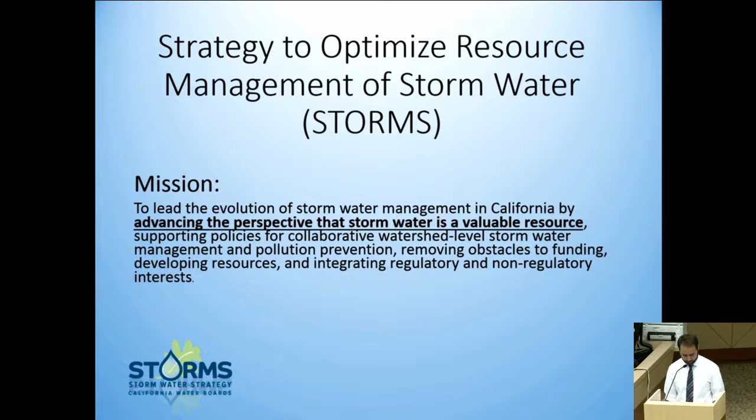My name is Matthew Fries, and I work for the Stormwater Planning Unit. We have the privilege of implementing the State Water Board's Stormwater Strategy, or as we like to refer to it, STORMS. The mission of the strategy to optimize resource management of stormwater is to advance the perspective that stormwater is a resource. These Storms seminar series are an open forum that feature new research, technologies, policies, and news relating to stormwater. And here to present on dry wells is James Mayer.

Okay. Can everybody hear me? Yeah? Okay, good. So, thank you, Matthew. Appreciate it.

It was great to meet you guys a couple months ago with Annalisa, and we'd love to have this opportunity to talk to you about dry wells and recharge this morning. So, we'll talk about deep infiltration in dry wells. A little bit about me. I've been in the commercial development engineering industry for about 22 years. I worked for the city of Scottsdale for the first few, so I got a municipal side of things, and then mostly as a consultant and a developer after that. But almost always I've been dealing with dry wells because I'm from Arizona and that's what we do there.

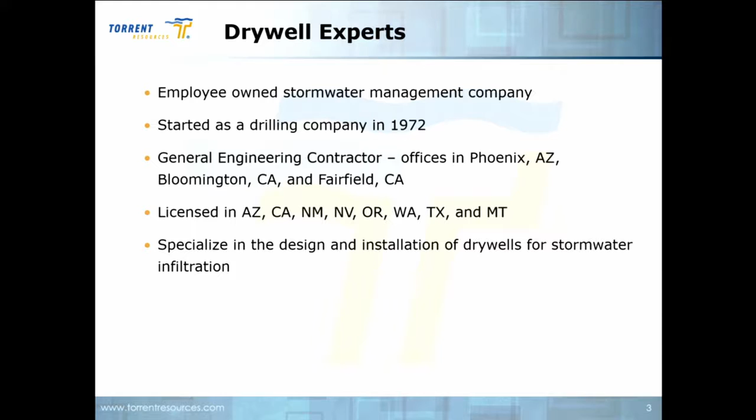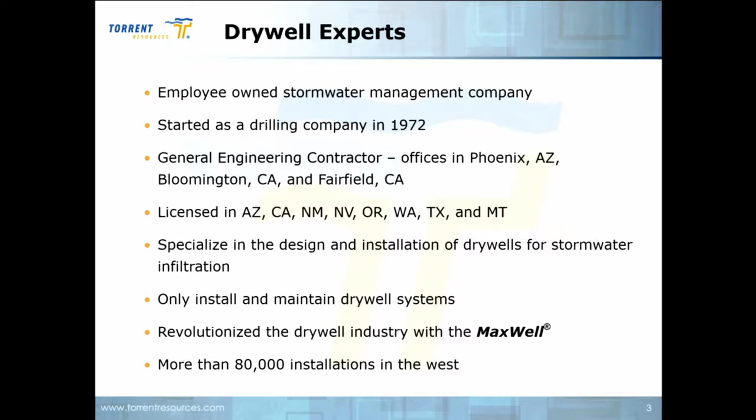So a little bit about my company, and the reason I'm talking about this is we are kind of dry well experts. We've been doing this for 43 years and we've kind of got it dialed in. We're an employee-owned company, started in '72 as a drilling company, got 3 offices, a big office in Phoenix, a smaller office in Bloomington, and we've got Travis Pacheco up here. He's sitting in front. The Bloomington office is growing very quickly right now, our Southern California operation. We're licensed in the West and Southwest, specialize in the design and installation of dry wells for stormwater infiltration. We only install and maintain drywell systems, and we're going to see a little bit about our MaxWell system, but it's a pretty generic look at it. 80,000 systems we've done in the Southwest. So that's our expertise, that's our experience, and that's why we're here today.

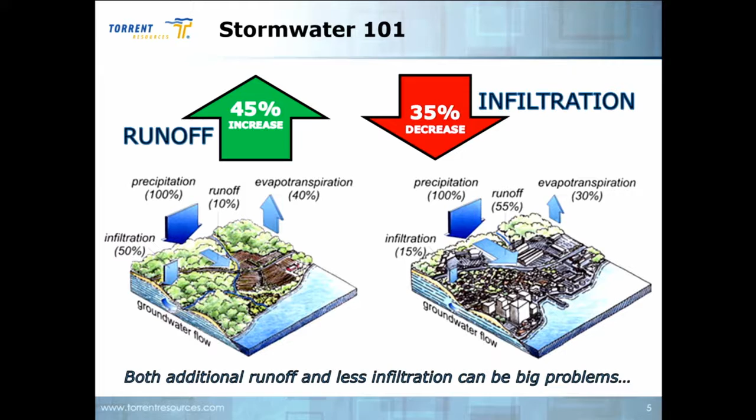So what that looks like functionally, before you've built anything, you've got about 50% of the water getting infiltrated, only 10% is running off. And after you urbanize or develop, you basically have a reversal of those 2 numbers. Only 15% is going down and 55% is running off. And that's a big problem. The additional runoff is causing problems, but also the lack of infiltration is another problem that causes us to want to store that water. So we're managing stormwater. The old way used to be to grade the site out to the street, let it go out in the street. Stormwater is moving into channels, creeks, or whatever, and it goes out sometimes to the ocean, sometimes to larger water bodies.

That creates a lot of problems. You get downstream flooding, erosion, waterway impairments. So the new way is starting to move towards, I think people are familiar with LID, low impact development. We want to catch the rainfall on site where it lands, or at least some portion of it, keep it there, sometimes just until after the peak is gone, and then we can either let some of it go down and let some of it go off.

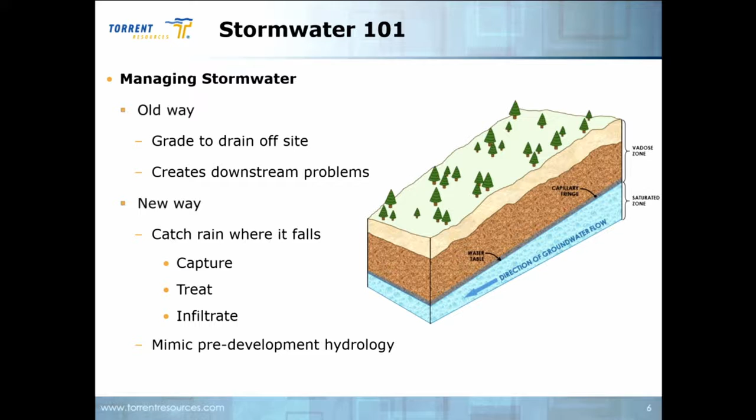But I think the big goal here is capture, treat, and infiltrate. And to the extent we can, we'd like to mimic pre-development hydrology so that we're still getting that 50% going down and only 10% going off.

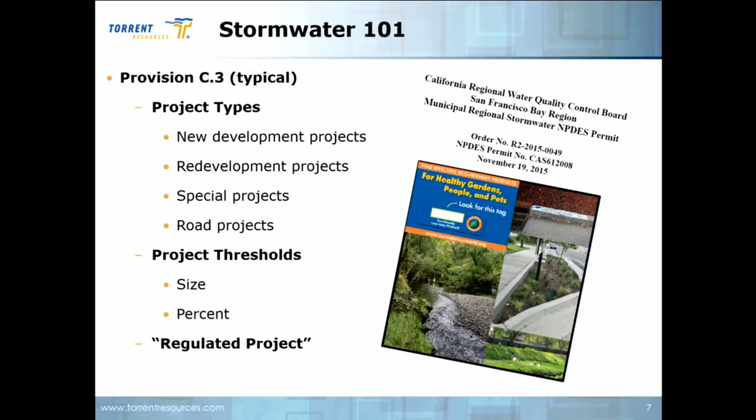So up here, I think a lot of policies, NPDES permits, MRPs, et cetera, have a provision C3, and that's going to be talking about the different thresholds we have, size and percent impervious for new developments, redevelopment projects, special projects, roadway. And once you hit those thresholds, you've got a regulated project, and then we start looking at what's required for that. So almost always, infiltration is the first thing they want to see. They want to do infiltration first.

After that, if you can't do infiltration and it becomes infeasible for a number of different reasons, we can go to harvest and use, evapotranspiration, and I think the last ditch is to do biofiltration and discharge it, let it go off-site. But for the purpose of today, we're going to talk about infiltration and focus primarily on that.

Can everyone hear me okay?

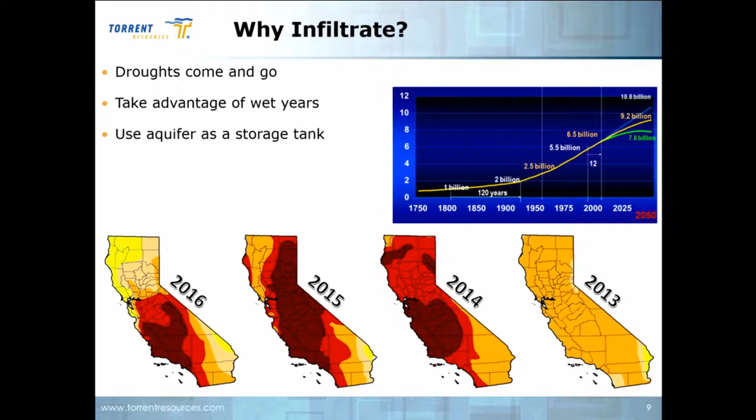So in the wet years, and we do have wet years, although it's kind of hard to remember some of them, we could be taking that water and we could be putting it back in the ground and replenishing the aquifers, use the aquifer for a storage tank. So we'd like to do it that way to the extent we can because our demand is only going to go up. Another big reason is subsidence.

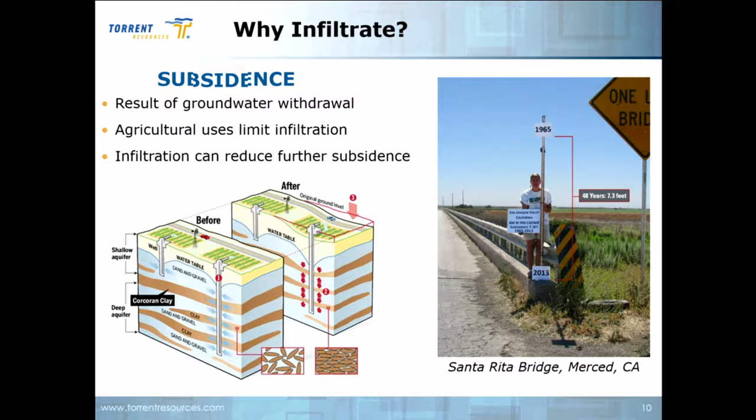And to the extent we can start to rehydrate those clay layers, which are getting dried out and collapsing, we can't reverse that subsidence, but hopefully we could at least stem it and prevent it from getting too much worse.

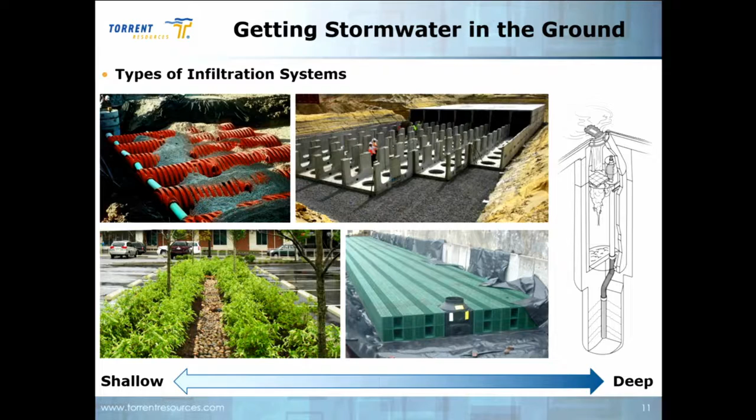So now we're going to look at getting stormwater in the ground. So there's a couple different types of systems to do that. We'll look from shallow to deep. So these are some examples of some different shallow systems, and then the drywell is here on the right side. So shallow systems are really good for sites that have permeable soils, and I think people like to say A or B type soils near the surface. So if you've got that condition, and that happens from time to time, you're going to get pretty good infiltration near the surface using a shallow system.

They're also good for storage. You can provide storage in the shallow system, and then the area beneath can be the infiltration part of it. They're really good with helping with earthwork because you're creating some fill. But with systems like this, having a pretreatment component for these types of shallow systems is really critical because, again, they're relying on all the gravel that lies beneath, so you've got to keep sediment from getting in that, because obviously you don't want to dig a system like this up if all that gravel gets impacted.

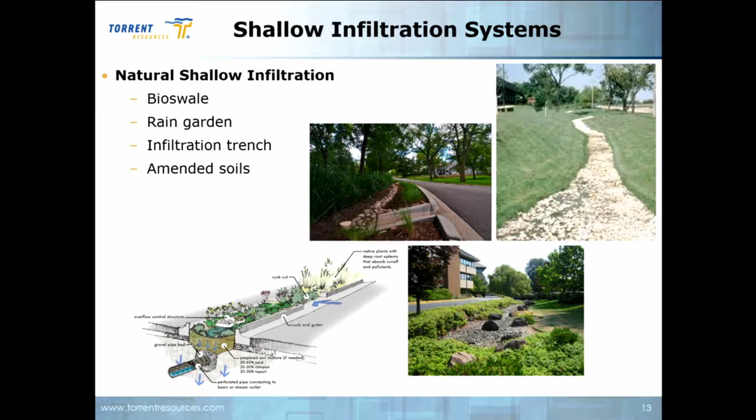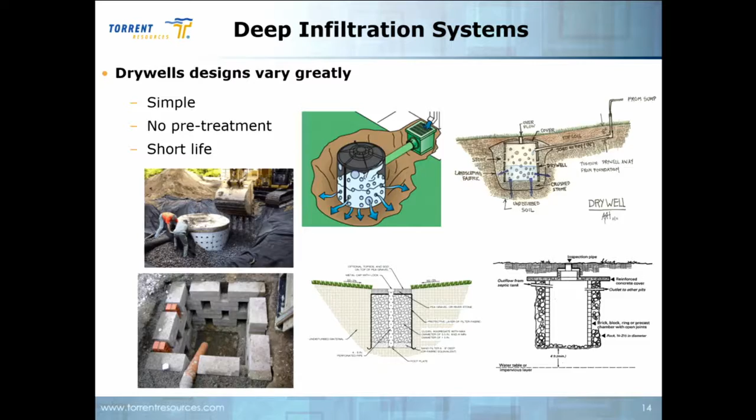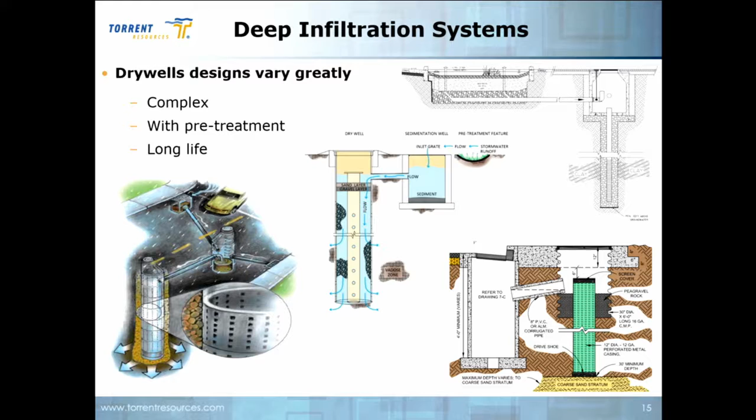Then we can have some more advanced drywells that have some pretreatment. I think this is Barbara's Elk Grove drywell. Here's a Portland example, pretreatment happening before it gets down into the drywell. And something here, pretreatment fills up and goes down into the ground. So pretreatment is the key, and we'll see that a bit more later. It's very important, and that's what gives you a long life and high performance.

So looking at a drywell, if we want to use one, there's a bunch of things we need to identify on the site. Most of these will be borne out by a phase 1 study and a geotechnical evaluation. We'd like to know where groundwater is—ideally we want to stay 10 feet away from that. Proximity to water wells, where they are in relation to your site, will also be identified in a phase 1 generally. What's the soil permeability?

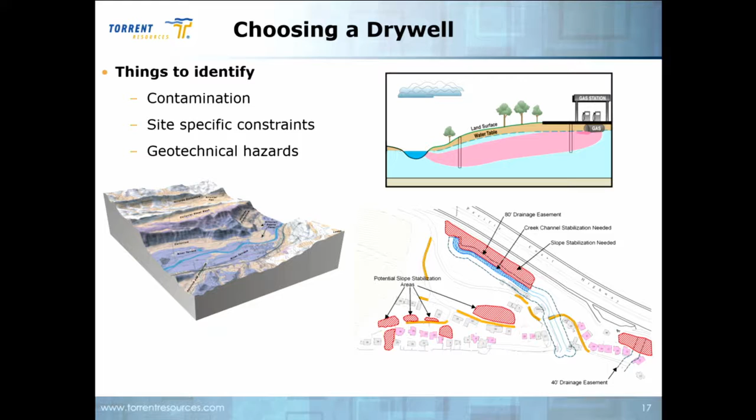Again, identifying the types of soils below, especially if you've got a confining layer. We want to know if we can find A and B type soils below, so we want to know where those are. We want to know if there's any contamination on the site—we want to stay away from that. And then any specific requirements, maybe buildings nearby, retaining walls, we need to stay away from things like that. And any geotechnical hazards—liquefaction, collapsible soils—we need to have those identified, and a lot of times that's taken care of in a soils report for the project.

The role infiltration plays: it helps with flood control, prevents downstream erosion if we're keeping some water on the site. We can mitigate the effects of hydromodification, help maintain the pre-development hydrology, and increase aquifer recharge.

And then we choose a drywell to do the infiltration. We get the added benefit of being able to get past the upper confining layers, if there is one. A very long service life, a very small footprint, and we can retrofit, especially some of those shallow systems. If they don't work any longer because they've gotten silted in or impacted, a drywell can be added to a system like that and make it work really well again, using the shallow system more for just the storage part of it.

Just something to note here, and this shows up on a couple slides: the drywell or the shallow systems, they're not doing any of the infiltrating—the soils are doing the infiltrating. So if you've got good soils below, the drywell or other system is just providing a connection from the surface down to the good soils, and hopefully it's got some pretreatment in it to prevent that from getting ruined over time.

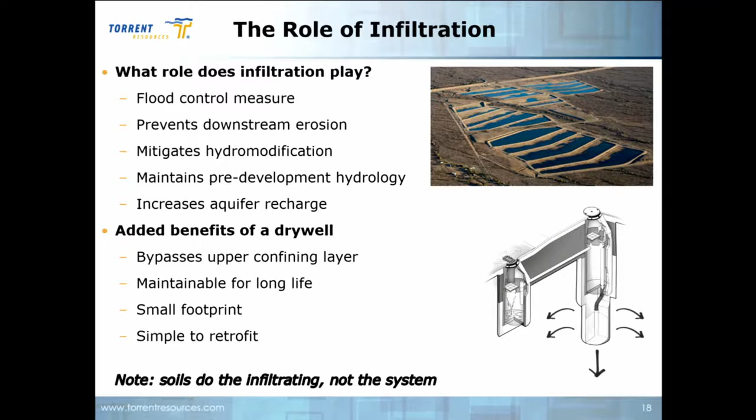So let's look at some different studies here—drywells have been studied for decades. The first one, the EPA came out in 2001 with a final determination. I think this spun out of the lawsuit from the Chesapeake Bay. They studied class 5 drywells and found that the absence of frequent, widespread, significant cases of actual contamination is good evidence that they have low potential to endanger. Class 5 drywells as a class or subclass do not pose an endangerment to underground sources of drinking water, since documented cases attributable to them are rare, and they did not show any evidence that class 5 wells as a class or subclass are contaminating underground sources of drinking water. That was a pretty definitive document, and it was a really exhaustive study they did from coast to coast. It's available online.

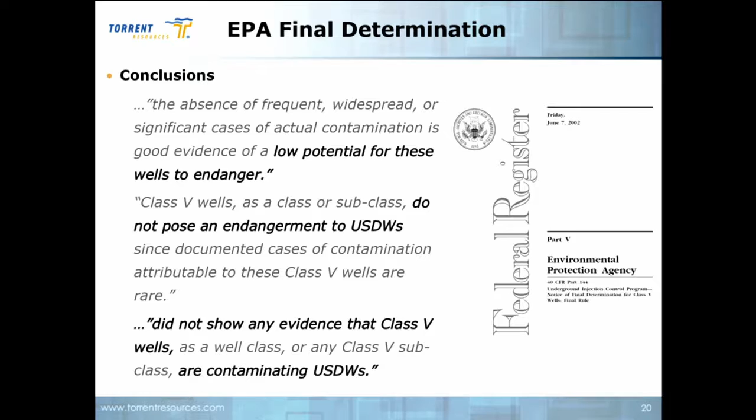This is a HydroSystems study done in Chandler in the 2010-11 timeframe. The whole reason for the study was to see how effective our system was at pre-treating and getting water back in the ground.

The site was about 24 acres, about 80% impervious, with one dual chamber drywell on the property. It was 7 months long, with 17 events - it rained 17 times, about 7.5 inches of rain. We got 92% average total suspended solids removal through our dual chambered system, and we were able to put 3.8 million gallons back in the ground through one drywell, one rainy season, on one piece of property.

So those are pretty big numbers, showing effective mitigation of all pollutants. It's an analytical based study, and I'm happy to provide all the tables and charts showing the reductions from solids to other different constituents.

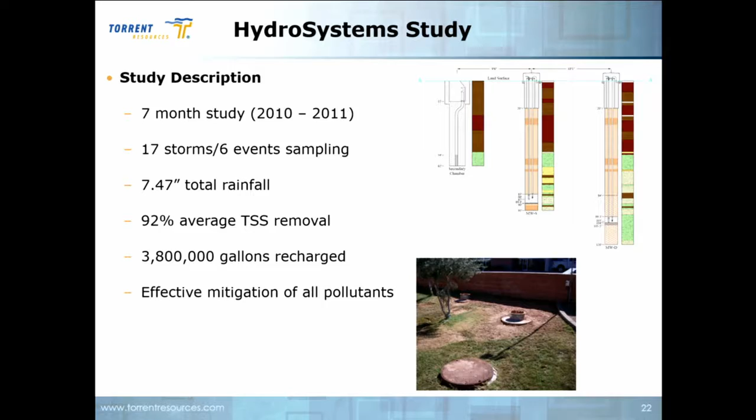So here's some conclusions: the quality of the stormwater processed through the MaxWell exceeded expectations. This study supported the use of drywells for efficient treatment and recharge of stormwater in commercial areas, and does not pose a significant threat to the underlying groundwater. We were able to recharge 3.8 million gallons instead of letting it run off to the Salt River.

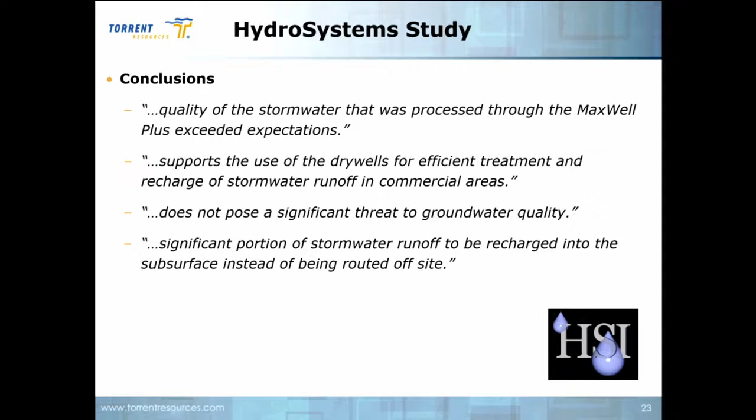Another study, GeoSystems Analysis, was contracted by the city of Chandler. The whole purpose was to see how the city's stormwater policy affected groundwater recharge. Just about every city in Phoenix has a 100-year, 2-hour storage policy, so when you develop, you've got to provide storage for about 8,000 cubic feet of water for every acre that you develop - large basins, underground tanks, etc.

So 2,610 acre feet a year was being put back in the ground - that's a 1,200% increase. The study went on to say the groundwater recharge from stormwater runoff and capture represented a potentially significant water resource for the city of Chandler. I can tell you almost all the major aquifers in Phoenix over the last 40 years have remained relatively stable despite our population boom, and I think this report really bears that out.

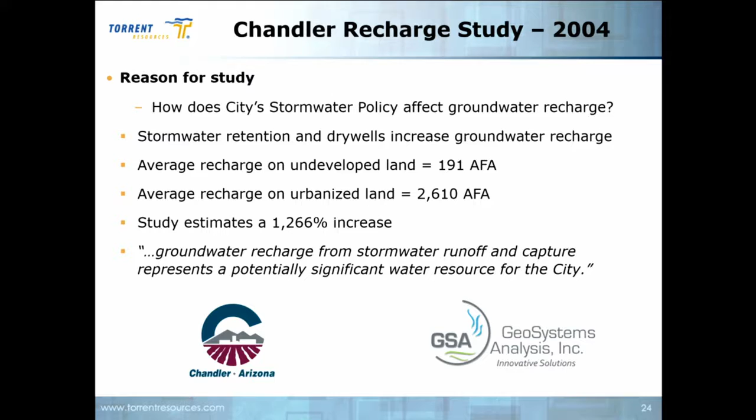The water augmentation study was done in Southern California. Who's familiar with this? Huge project - it was 7 years long, and I think they're still continuing to monitor this to some degree. The reason was to see if it was safe and effective to infiltrate urban stormwater into the aquifer.

So they estimated in this watershed - it's an enormous watershed of the San Gabriel and the Los Angeles rivers - about 578,000 acre feet a year through one rainy season was available for capture and recharge. They selected 6 sites, ranging from a school all the way up to a metal recycling yard. And this is what the cover of the summary looks like.

Really great document. They did it for 7 years, and the results came out that stormwater infiltration was really good - again, an analytical-based study with all kinds of charts and tables, just volumes and volumes. That's all available, and I'm happy to provide it or point you to it.

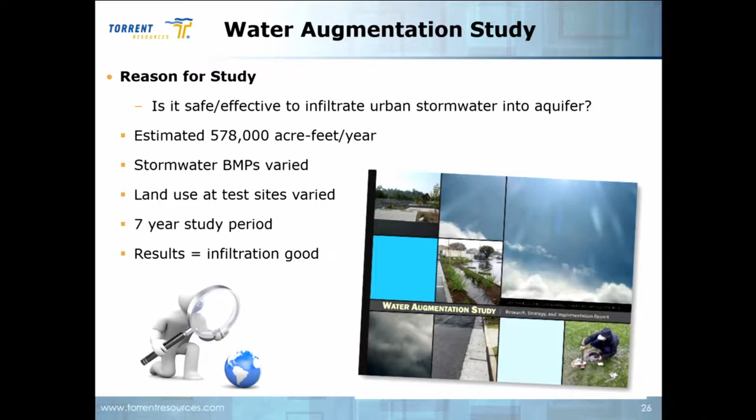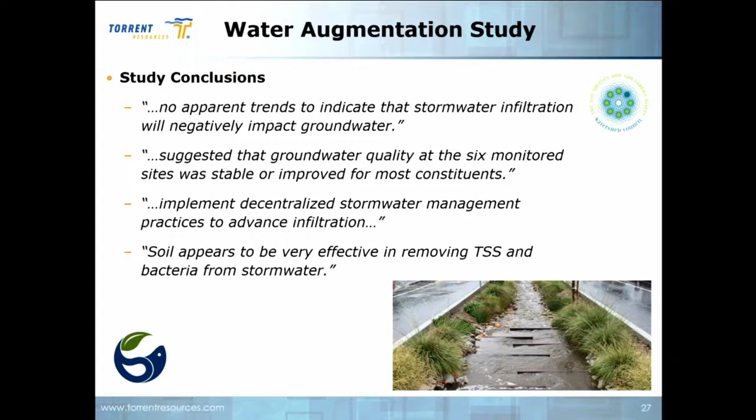So no apparent trends indicate stormwater infiltration will negatively impact groundwater. It suggested that the quality of the groundwater at the 6 sites was improved or stable for most constituents, and they surmised in the report that the groundwater was dirtier than the stormwater, so it was getting diluted. They recommended a decentralized approach for stormwater management - that's the LID, where you capture some part of the rainfall on site and don't grade the site out into the street. Soil appears to be very effective at removing total suspended solids and bacteria out of the stormwater.

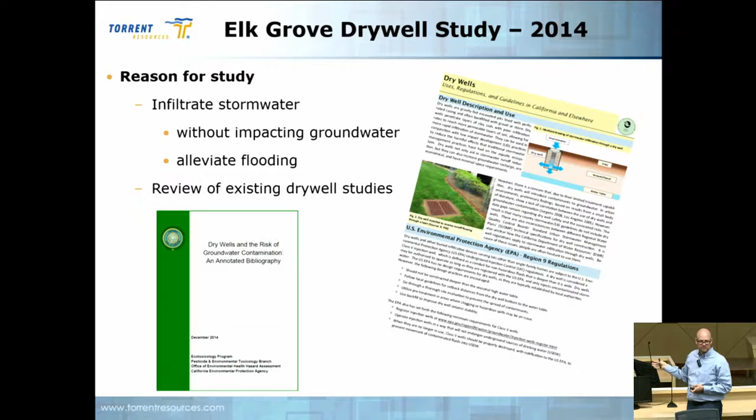So I just took a look at the Elk Grove study. I think Barbara's here - her group put this together a couple of years ago, and I think they're wrapping it up and will start presenting some details and data soon. The whole reason for this one was to see if they could infiltrate stormwater without impacting groundwater and help alleviate flooding. For today's purposes, I'm just going to look at the annotated bibliography of about 20 different studies done from coast to coast, and generally discuss what they found in their evaluation.

Vadose zone wells provide excellent filtration through all that soil before it gets to percolate down. And again, stormwater is a valuable resource. I think that's a common theme that the state has picked up on.

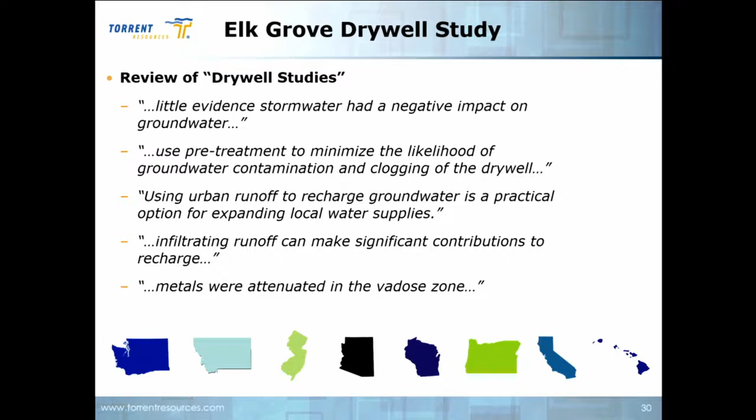So some of the findings that spun out of this study: there's little evidence that stormwater was negatively impacting groundwater. Again, use pretreatment to minimize the likelihood of groundwater contamination and clogging of the dry well. Urban runoff to recharge groundwater is a practical option for expanding local water supplies, and infiltrating runoff can make significant contributions to recharge. Metals were attenuated in the vadose zone, due to all that filtration occurring with that separation.

One last one: the Central Coast just came out with this in 2015, the Low Impact Development Initiative. Geosyntec looked at dry well BMPs and provided recommendations in their report, which is kind of a memo. They're looking for statewide regulations, standardized BMPs, and drywell maintenance recommendations.

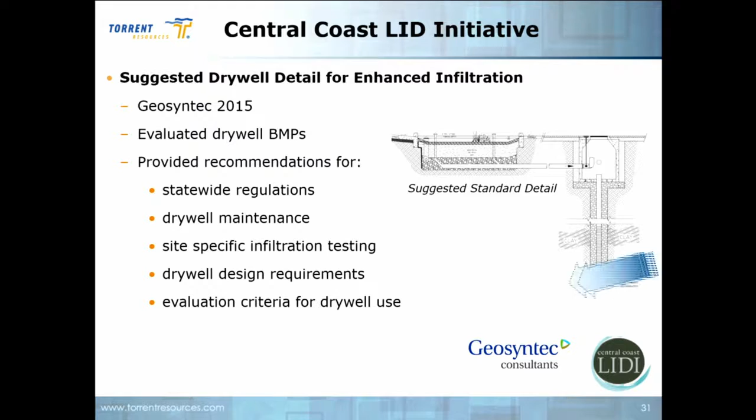They highly recommend looking at the site in detail to figure out whether you should use dry wells on it. There are some drywell design requirements, and ways to evaluate a site. We're going to look at these last two items in the next couple slides.

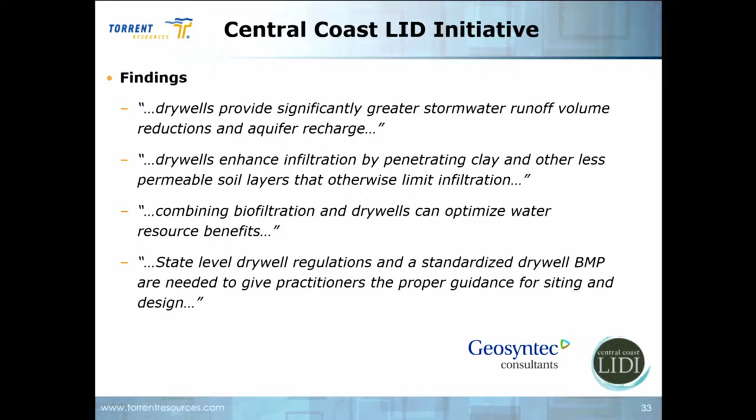So here they say dry wells provide significantly greater stormwater runoff volume reductions and aquifer recharge. Dry wells enhance infiltration by penetrating clay and other less permeable layers that otherwise limit infiltration. Combining biofiltration and dry wells can optimize resources. State level regulations and a standardized BMP are needed to give practitioners the proper guidance for siting and designing dry wells. I think those are pretty big findings coming out of here.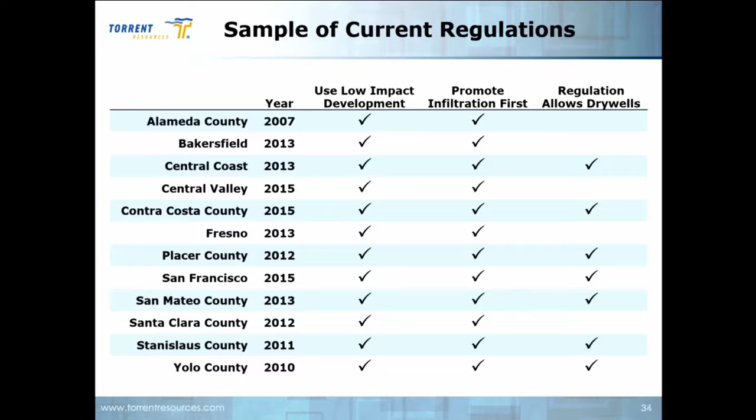Some of the regulations we looked at up here in Northern California - you can see on the left, we just looked at whether low impact development was required or at least recommended. All of them said promote infiltration first. A handful of them even had allowances to use dry wells in the language of these policies and regulations. So there's quite a few places up here that already allow dry wells, or at least we'll look at them so we can go and do that.

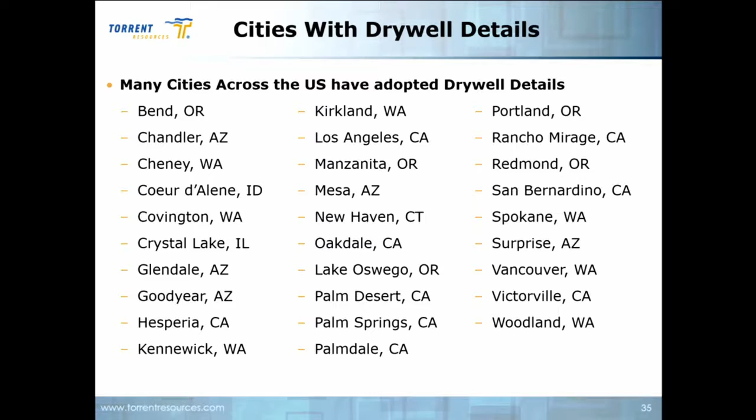A number of cities - I just looked across the country, this is not exhaustive - have their own standard details for dry wells. Arizona has quite a few, but all the way back east Connecticut does too. Oregon has quite a few, and Washington State, where they use dry wells pretty regularly. Here's some different examples.

Standard details are a good thing. It lets people know that they're available.

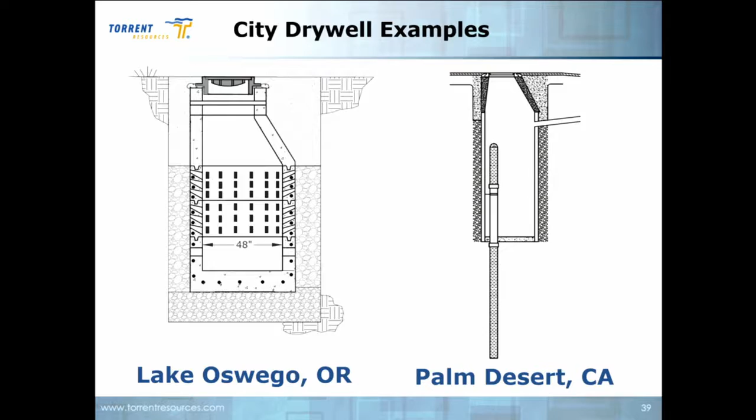So engineered dry wells - these are Torrent Resources. These are our MaxWells. We started in 1972 with our MaxWell 1. We're up to MaxWell 4 now, and we also have a MaxWell Plus, which is a dual chambered system, and we'll see coming up about that. They are pretreatment devices as well as infiltration devices, designed to get the water back in the ground as quickly and cleanly as possible.

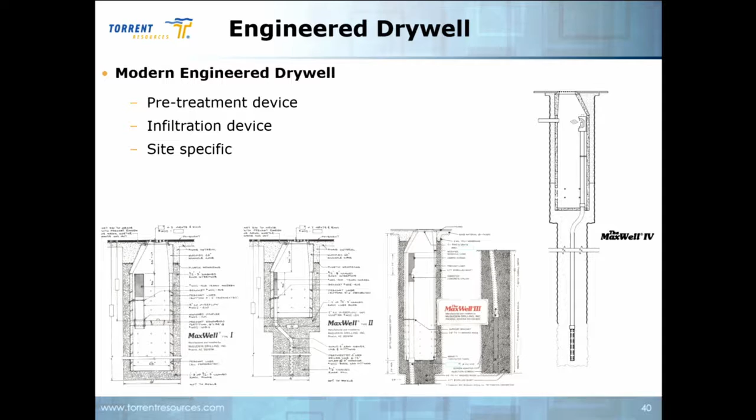They could be site-specific. We can tailor them, especially in areas where we've been. We use our boring logs, and we can set the depths. Where we have experience, we generally don't rely too much on the geotechnical engineer's data. We have our own boring logs and depth information.

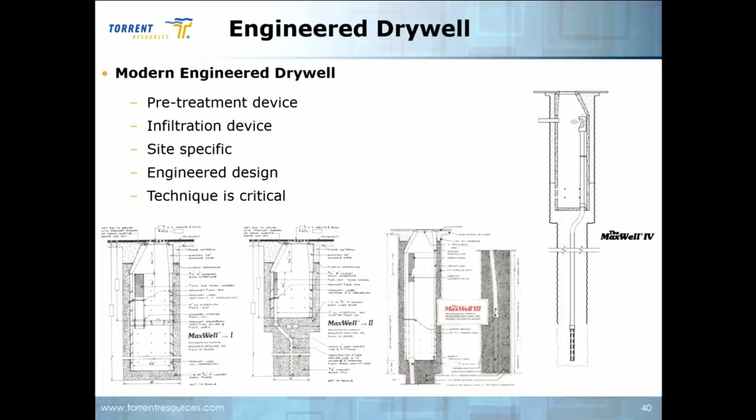So the design's engineered, and most of it is patented. And then the technique in which they're put in is pretty critical to how they function. So most of the people that are with us have been doing it for 15, 20, 30 years, and they can really get these things in quickly and make them work well.

So some of the reasons why dry wells work good, again, I mentioned confining layers. Generally, we see some pretty consolidated, compacted material near the surface. Once you get down into the 25-foot range, you start to see better, looser, uncompacted material that will be free draining, alluvium, sand, etc. We get the benefit of a taller water column.

Everybody knows if you swim to the bottom of a swimming pool, you feel pressure in your ears. That's the same pressure that helps our dry well work a lot better than a shallow system would. So for every foot of depth you go down, you get a little bit under a half a PSI. So for a 69, 70-foot dry well, there's an additional 30 pounds per square inch of water pressure just pushing that water down into the ground and out into the soils as quickly as it can go. It's a huge differentiator between a shallow system and a deep system.

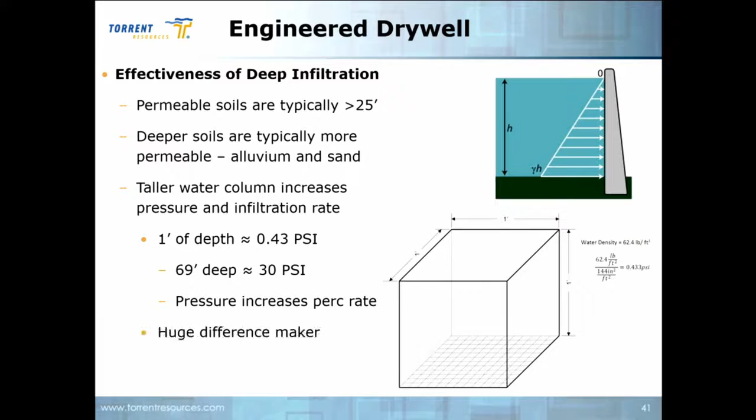So that pressure increases the perc rate. Huge difference maker. So here, let's look at some engineered dry wells, and this is our MaxWell 4, our single chamber. But again, soils are doing the infiltrating, not our system. So a single chamber, these are ideal for large landscape areas where there's a little bit of overland flow. The water's got to flow overland before it goes in.

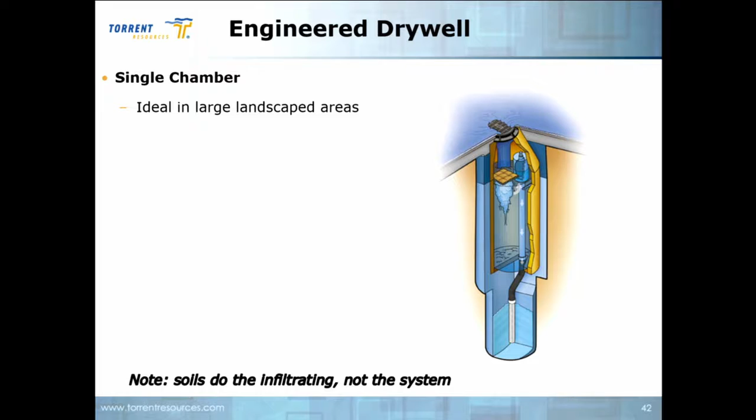Ideally, you'd use a bioswale or some sort of upstream pretreatment. We're getting big TSS removal, that anything that makes it through will get settled out in the chamber up to here before it overflows. The screen and the shield on top will help keep anything that happens to be in the water from getting down into that white pipe, because that could clog up the system below.

Floating hydrocarbons can be removed by this little square orange pillow in here. Each one can hold up to a gallon of product like gasoline, diesel, oil, grease, whatever might come in with the stormwater that doesn't get removed, that thing can help take out.

And then the number of dry wells is generally going to be calculated depending on a number of factors like soil infiltration rate, depth to groundwater, and we can kind of back into a design and figure out how deep it should be and how many you would need.

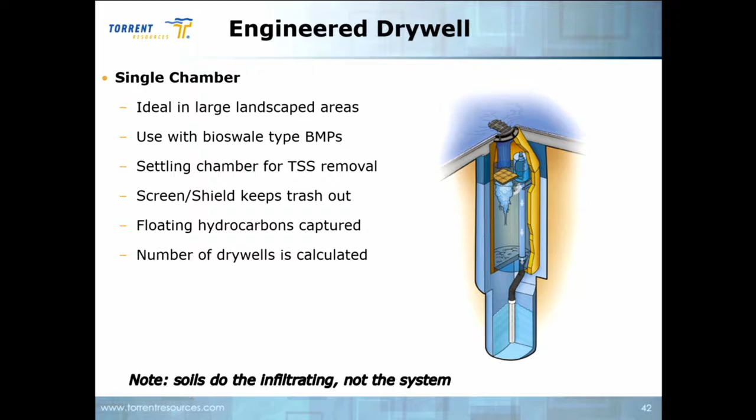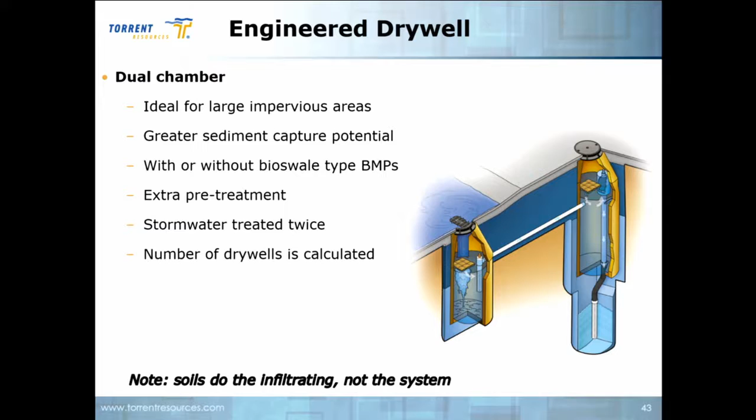These can be used with or without bioswales or upstream BMPs. They work phenomenally well, and again, this is the one that was tested in our Chandler study that we did, and we got a 92% average removal of suspended solids through this system. We get the extra pre-treatment, stormwater is treated 2 times, and the same deal, the number of drywells is calculated on a number of different factors that we get in the design phase from the civil and the geotechnical engineer.

So just to recap, when we're looking for drywells, using drywells, we'd like to know where groundwater is. Ideally, we could drill to 120 feet, so ideally groundwater is at 130 feet so we can get that 10-foot separation. The average depth of a drywell we've installed in the Southwest is probably about 80 feet. So most don't go to 120 feet. Some of them are put in as shallow as 20 feet, depending on the soils. So it just varies. We never want to put a drywell on a site where they're going to have hazardous materials stored or used. We're going to make sure we keep them separate from that.

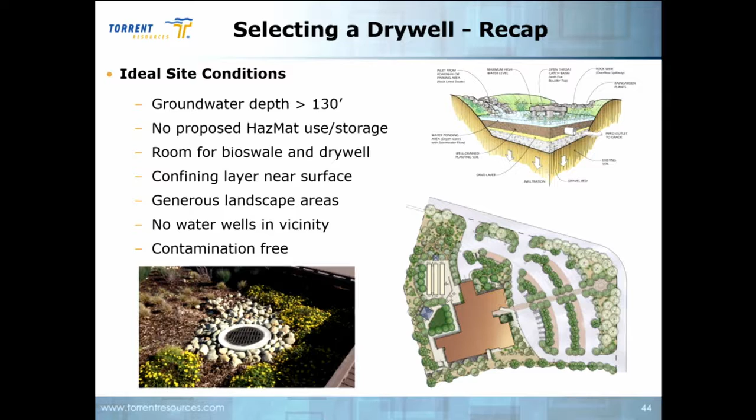Ideally, we'd have some room on site for doing some upstream bioswale or some sort of treatment. A great thing to have for a drywell is a confining layer, because if you've got that, you need the drywell to get past it. Generous landscape area, no water wells in the vicinity, and ideally we don't want any contamination, plume or anything. We want to stay away from that completely because we don't want to spread it or make it worse.

So we'll look at building an engineered drywell, drilling and building. So our rig, this is called a bucket rig. We have a number of these that will mobilize to a site. Generally takes 2 to 3 days to put in a drywell from the day we show up until the thing is ready for use, completely constructed. So the bucket here is 4 feet in diameter, and you can see it kind of going down into the ground. It's about 4 feet tall, so we're taking soil out of the ground at 4 feet at a time. It's about 2.5 yards of soil every time the bucket comes out to dump.

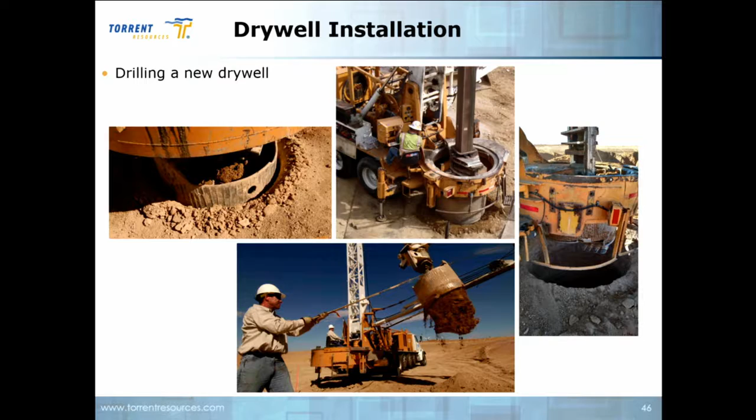So I mentioned 4 feet. You can see down here in the lower hole, the bucket's down there, but then the upper hole is a little bit bigger. So after the hole is drilled, say for instance we were going to install a 70-foot drywell, we would drill the 4-foot bucket all the way down to 70 feet. We take the bucket out, and they pop out a little arm on each side or just one side, and they'll send it down the same hole, and they'll basically ream out the upper hole to 6 feet in diameter. And I'll show you why we do that in a second, but you can see it clearly right here. So this upper hole, 6 feet, lower hole, 4 feet.

So we need that because our chamber material needs to sit in there. So down here, the 2 dark lines are 4 feet apart, and the upper lines are 6 feet apart. So after we fill the gravel, we got to nest the chamber down in there, and then we fill around it with some gravel and concrete.

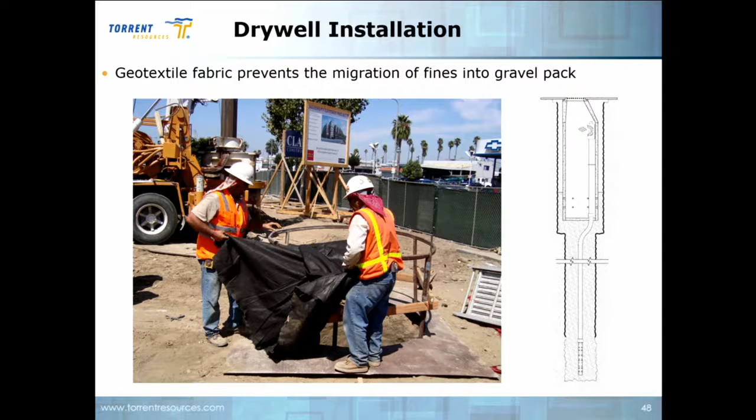So the first thing we do after the hole's drilled is we put a sock, that's that heavy black line, all the way down toward the bottom of the drywell. That's going to keep fine material from coming into our gravel pack and clogging it up. And also, if it moves from outside into our gravel, it could create some softness, and we'd have subsidence coming down the side of the drywell. So we want to prevent those things, and the sock does that nicely.

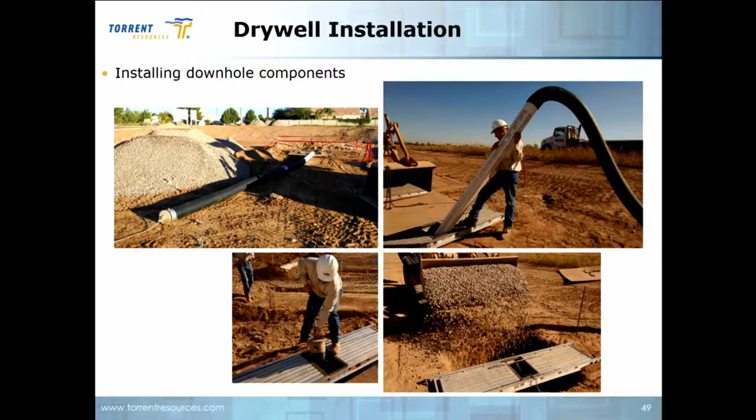Then we have our flexible pipe that we cut to length. There's an 8-foot tall slotted well screen that we buy from the factory. That's all 6-inch diameter. So they'll lower that, they kind of suspend it off the chain right here, and they'll lower it down into the hole. And you can kind of see there's a T right there and a chain hanging down into the drywell, and we'll see that clearly right here. So the bottom of that screen pipe is at about 1 foot off the bottom of the overall excavation.

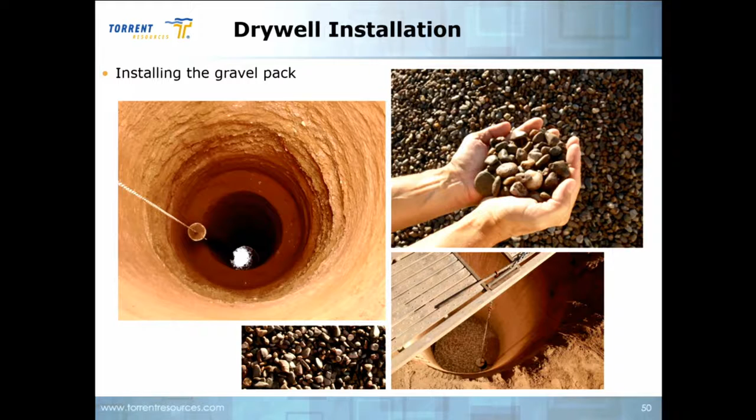And then we'll start dumping rock in the hole, which is the gravel drain field. It's about 3/4 to 1 inch clean wash gravel that has very, very little fine material in it. So it's 30 to 40% void space in it, so there's quite a bit of storage just in the gravel pack. And then we put the liner down in the hole. So the liner gets placed in. The first piece that gets put in is perforated, so that after the storm's gone, there's a way for the water to get out into the gravel on the sides and not stay full, which could create vector control issues.

If we're going to put a drywell in pavement, which we do regularly, we would leave our framing grate loose, so whoever comes in last can put it right where they want it with shims and get it to fit in the pavement or the concrete just right.

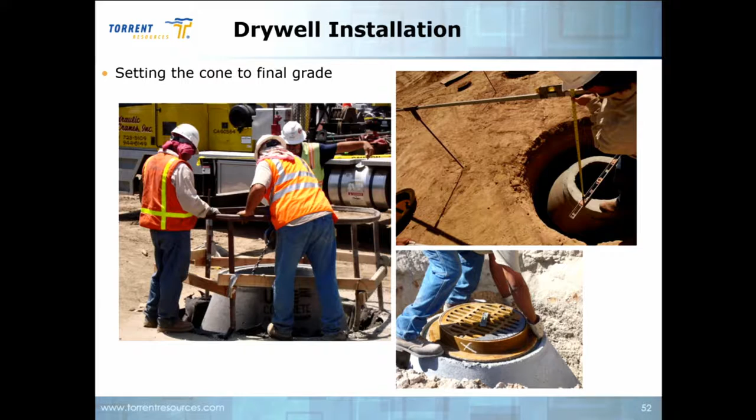If we're going to be in a landscaped basin, we generally want the grate up about 2 to 3 tenths above the design grade in the bottom, just to prevent the last bit of stormwater from dragging all the really nasty water into the dry well. We want that to settle out through the bottom.

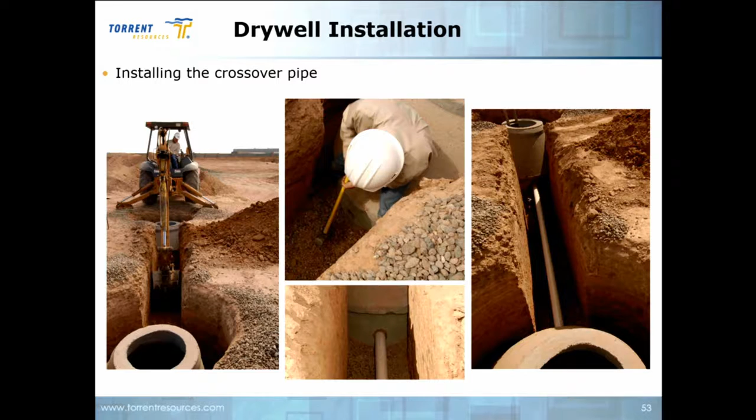So once we've constructed both chambers, we just trench across with a backhoe to put our crossover pipe in there, and you can see it sitting right there. Again, there's the slotted pipe in the dry well primary chamber. It's got slots in it, again 1/10 of an inch only, so anything bigger than 1/10 of an inch, that solid's going to get left on the primary side. We patch up all the penetrations we've made with some non-shrink grout to keep anything from coming in.

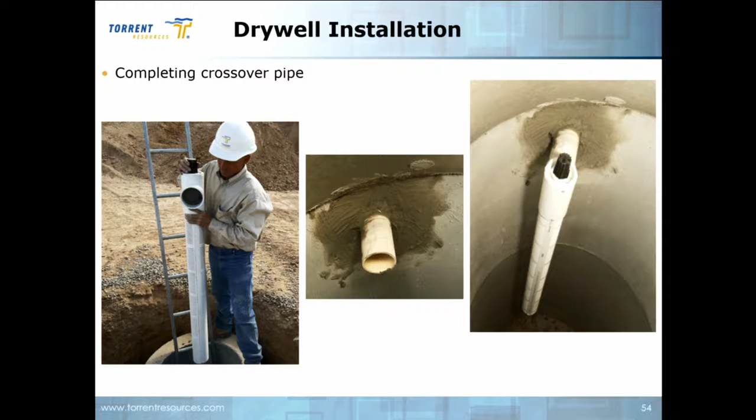So this is the primary chamber side, so as water comes down in here, it fills up, goes through the slots, and it goes this way, and this is the dry well side, so it will pour out here and start to go down in the ground through the dry well. When we're done, we use a 2-sack slurry to fill in all the trench near the surface all the way up to subgrade to prevent subsidence and lock everything in place.

And then we usually put fabric on top of our grate because we're out there very early in the process. Usually right after rough grading is done, we show up. So there's still months and months of construction going on. We want to keep that construction stormwater out of our dry well while the site is being finished.

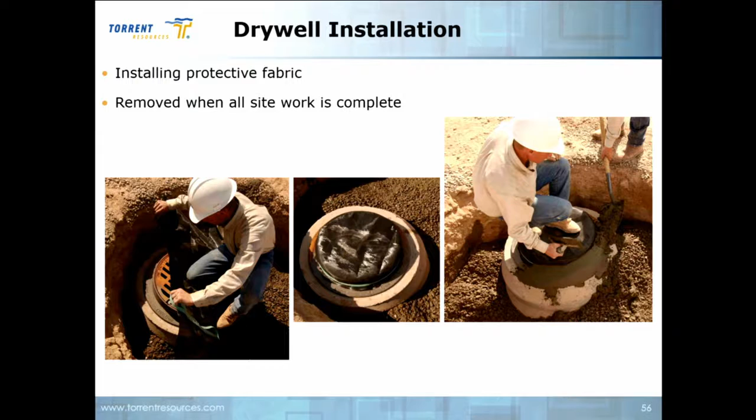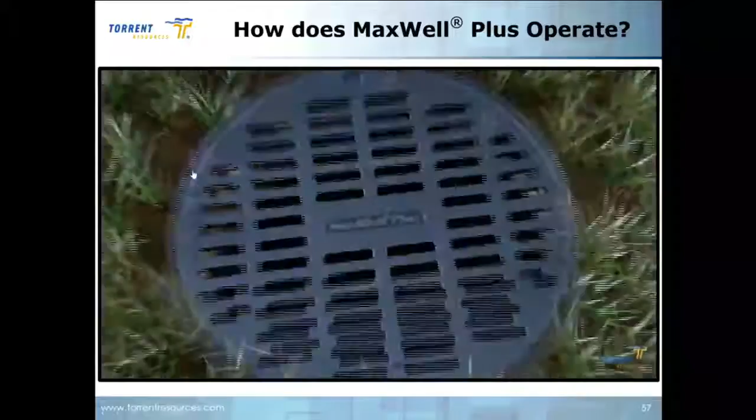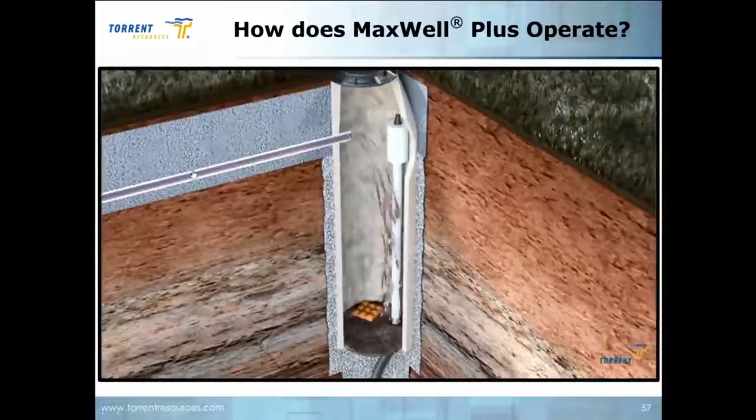I'm going to play this little video. Okay, thank you. So this is just an animation that shows how our system operates. So you can see the pillow floats. As water flows in, it stays on the surface. Those are that slotted pipe. Water moves over. And if something does get through, there's a little bit more storage volume for sediment and debris on this side that it can settle out before it goes down.

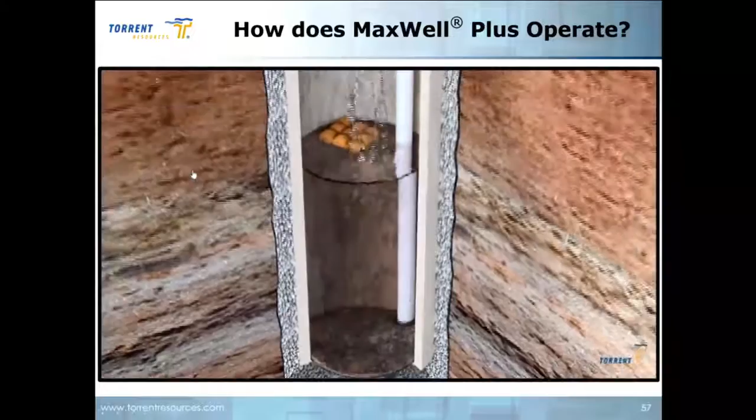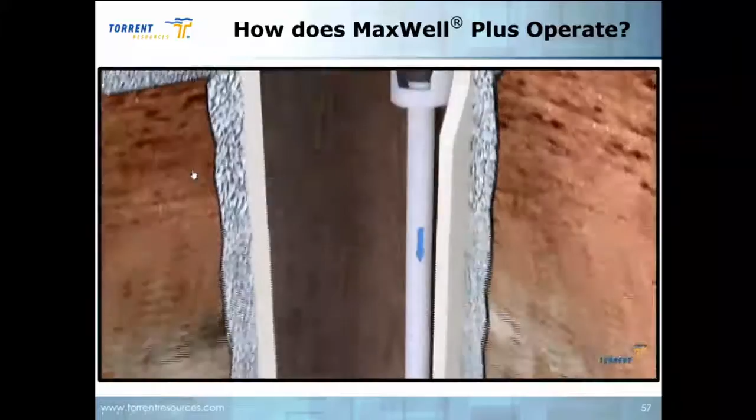So you'll see right here, this is going to be like a little split away. The only way water gets in this pipe is through that little annular space right there. It goes down into the ground. So ideally, everything up here is consolidated and doesn't drain, and this is where all the good soils are down here, and it lets it out. Cool?

That's a good question. She asked how long till we have to replace the pillows. We've never had to replace one because it got full. They start to get black around the edges just from the little bit that comes off of a parking lot. But generally they get vectored out. Once the pillow gets activated or used, it becomes inert, so it's not even hazardous. We'll vector it out with the cleaning, with all the sediment, trash, and debris, and it just goes in the landfill, and we throw a new one down the hole and move on.

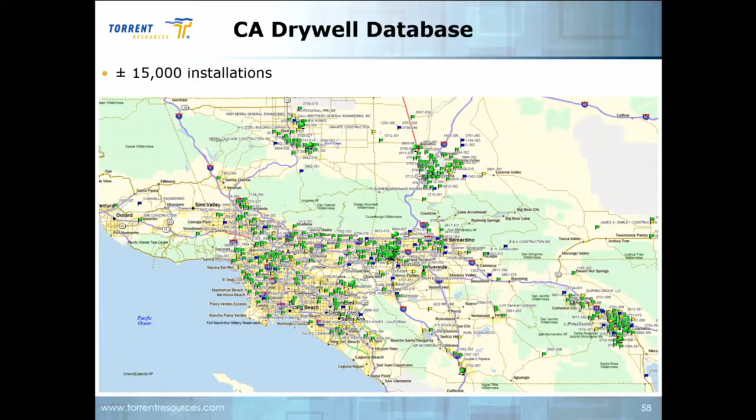So here's a visual database of our installations. This is Southern California. This represents about 15,000 dry well installations; the most we've ever done in Southern California is 30 dry wells on one project. So 1 to 30. Obviously we've been in Arizona for quite a bit longer, and over there we're treating and disposing a lot more stormwater. So that's 65,000 dry wells right there. Very well covered. They're the go-to. Dry wells are required for pretty much every municipality in Phoenix.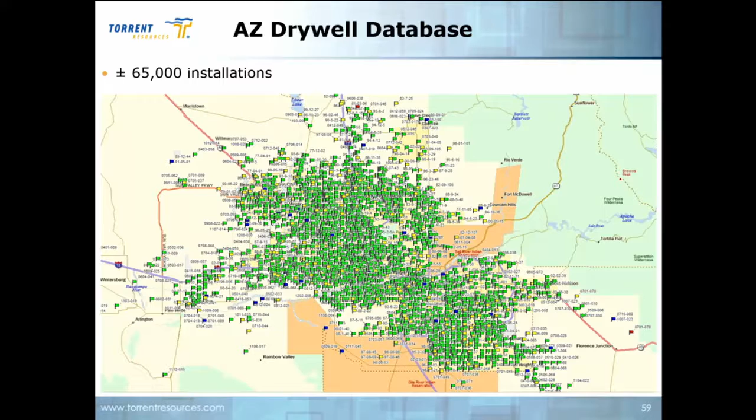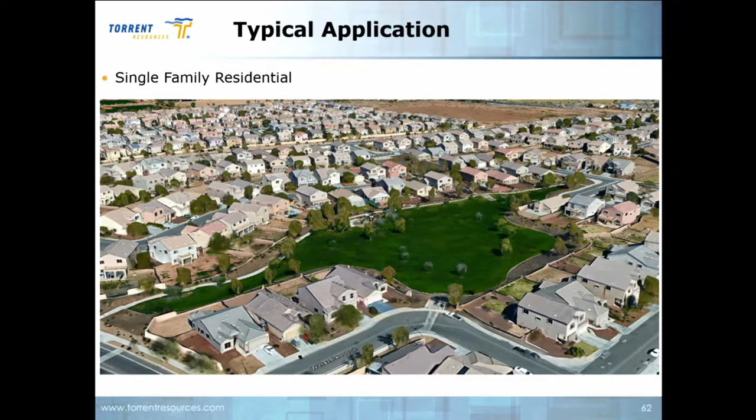So let me point out, a system like this, where there's a lot of grass, maintenance on something like this for our systems is generally 7 to 10 years between maintenance cycles because of all that grass. It does a really, really great job of filtering.

You can get a system like this, though, where the drywell's sitting up front here. This thing may need maintenance every year with all that litter and debris and leaf drop. So we let people know when we're done, hey, listen, this might need maintenance more frequently. It's an HOA, they can keep an eye on it. Usually, if it's a plus system, once the debris starts to get up toward the bottom of that screen, we want to get it sucked out before it starts to impact the slots.

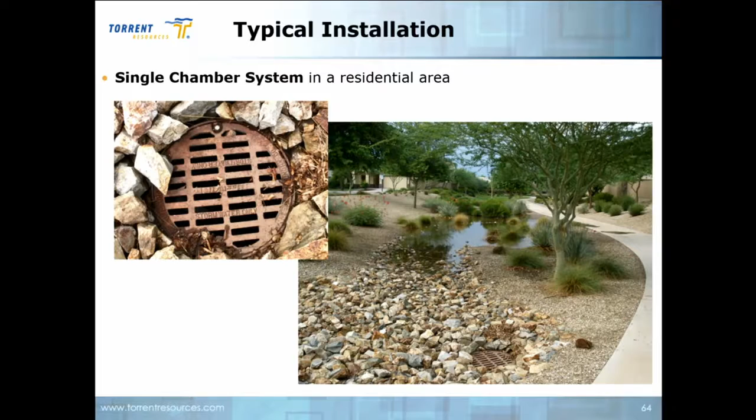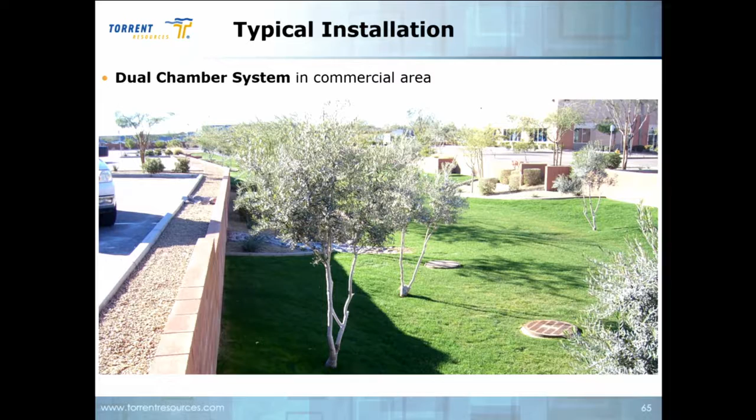Here's another one. This is a good example of seeing it sticking up about 2 to 3 tenths above the bottom of the basin. That's ideal. It's a brand new installation.

Here we can put it with underground storage. This is a very typical application for Phoenix, and we're starting to see this more and more in Southern California, where we've got large diameter corrugated metal tanks that are going in to provide the stormwater storage volume, and then the water's got to come out of there, and you can see that tailpipe right there. That'll be connected over, and that's a primary chamber. So there's about 6 feet more of chamber below the ground surface right here. That's going to provide that sump for anything that's left in the stormwater to be captured out before it moves over into the well.

The pipe, yes. She just asked about the storage tank and how it operates. That's very standard for Phoenix. Southern California has a lot smaller volumes of water, but they are using that more and more. Sometimes they're using plastic, like 60-inch diameter. We see that now in Phoenix, 8, 10, 12-foot diameter pipe, huge tanks. And we can accommodate. You can kind of see the section right there. The water gets in and it goes across and then down.

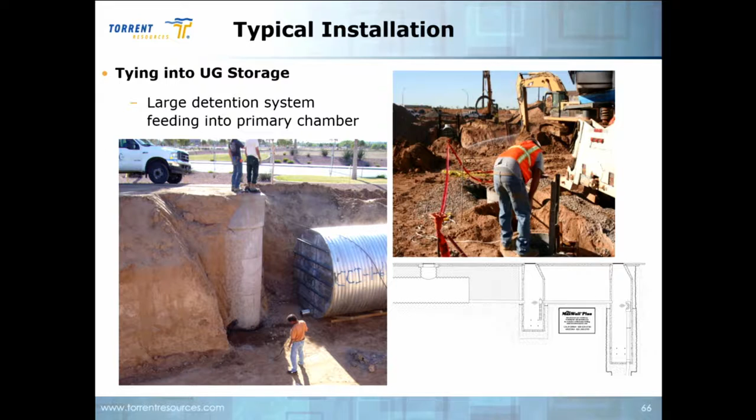Another application, this was on Glen Oaks Boulevard in Los Angeles. Every time it rained, this intersection was underwater for days. The City of LA asked us to come in there. We put 5 drywells in this intersection. The first one right here, you can see this pork chop traffic diverter. They put a curb inlet right here, and they put a pipe across. There's a primary chamber there, and then they put a drywell on either side, and it's all finished in the sidewalk. So you can actually see the pork chop, the back of it. There's the saw cut, primary chamber, and then drywell. And here's the front, the way it looks.

So these did a great job. They're capturing up to 9.3 million gallons a year just from this intersection through 5 drywells. And then across the street, right over here, there's another drywell. This one is a curb inlet right here. It goes to the primary chamber. And then in between, the City of LA asked us to put a meter. So we put a meter vault right here, and then the drywells right here. That's the meter in the meter vault, and it's just a flip-up cap. They can take a direct reading, and they just assume that all the drywells are working the same, and they can read it once a year or through the rainy season and track how much recharge is occurring. And it's really helped the flooding quite a bit.

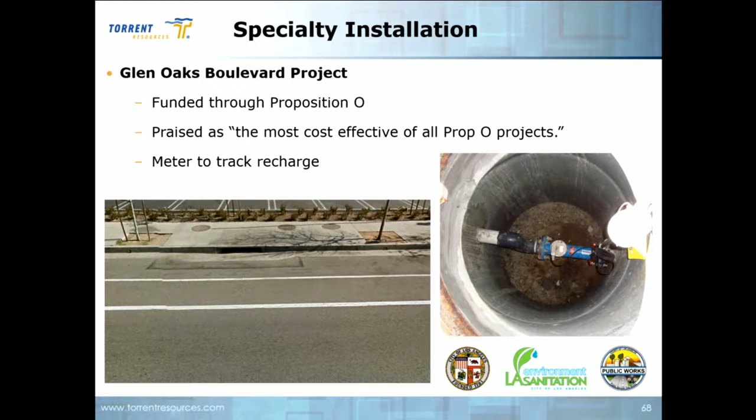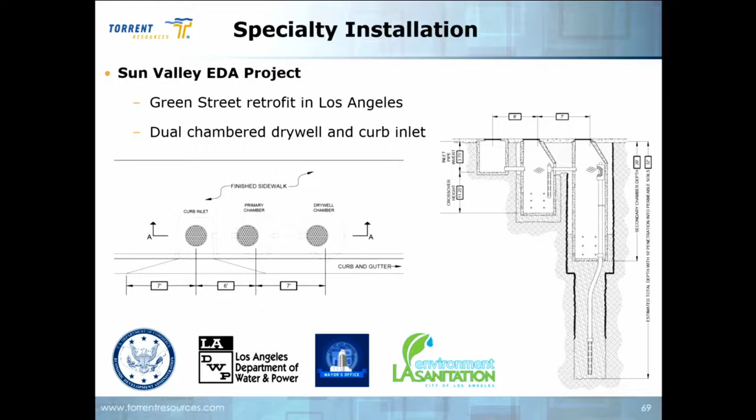Another one, this was just a couple months ago, very similar, and again, City of LA design. So curb inlet, primary chamber, drywell chamber, and you can see that right here. This was a Green Street project down in Sun Valley. There's lots of stuff on the internet about this. We put in 46 drywells on a 1-mile stretch of street, and even some of the streets that are up the hill, so the water comes down, and before it gets into the street, it's being captured out of the curb. It's been pretty successful, and it's Branford Street in Sun Valley. So all the drywells are right along here, and you can see it right there completed.

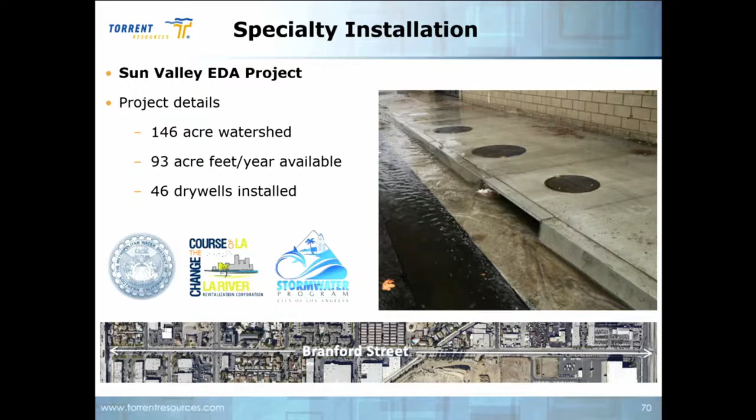That's the curb inlet. It goes into the primary chamber where it has a chance to settle, and then goes down into the ground in the drywell. I think they're only 35 feet deep because it's really, really sandy material here, and they're taking tons and tons of water. The City of LA, DWP, is going to share some data with us. They've got sensors in a number of these wells, and they're going to share that data with us pretty soon. Some other things we do in Southern California, this is Olympic and Olive in the downtown LA area.

We're putting drywells under buildings. So 2nd, 3rd story below grade parking. Before they build anything, we get down there. Our drill rig's in the basement. You can see that's the lowest grade, and the street level's up here.

So usually these are 100% impervious projects. They've taken up back of sidewalk to back of sidewalk. All the roof water gets piped down to the basement into a vault. The vault's connected to our drywell, and it goes down into the ground right here. So we've done that on all 5 of these projects now, and a number of others as well.

So talk about the confining layer. San Diego project, this was our first San Diego project, January of last year. It was on UCSD's campus. You could see here how clay the soils are. This is the excavation for the underground storage system. This was a parking garage project. So all the water coming off the parking garage was going to be captured and infiltrated through a shallow system,

but they figured out really quickly after they did the perc test that the shallow soils were not going to take any water at all. So we hired a local driller with a geotech rig, and they drilled a 70-foot hole for us, and they did a perc test down the hole, and they had 160 inches per hour of infiltration rate through that hole. So obviously the drywells were going to work.

We put 2 of them on the site, and they worked so well that the civil engineer was able to reduce the overall amount of storage that they provided to a 50-year volume instead of a 100-year volume, and I believe the difference in cost more than paid for the 2 drywells. And I think it was about 0.28 cubic feet per second through the drywells, which is like 130 gallons a minute sustained flow rate.

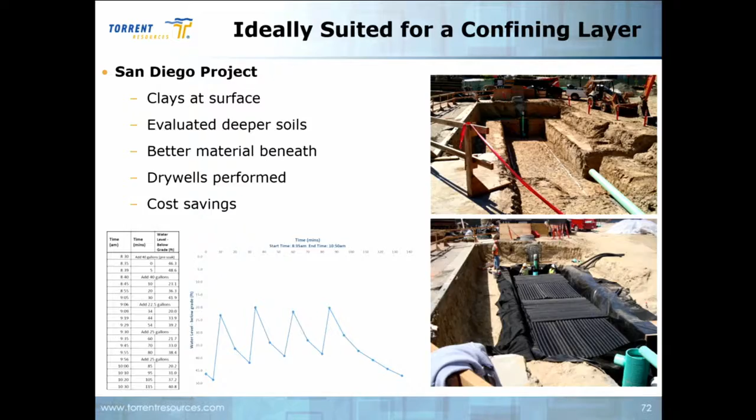So our maintenance here, very simple. It's a Vactor truck. You can see our Vactor truck right there. We've got 5 of these. Basically remove the lid, loosen up the sediment that's collected, Vactor it out, and take it off to the landfill.

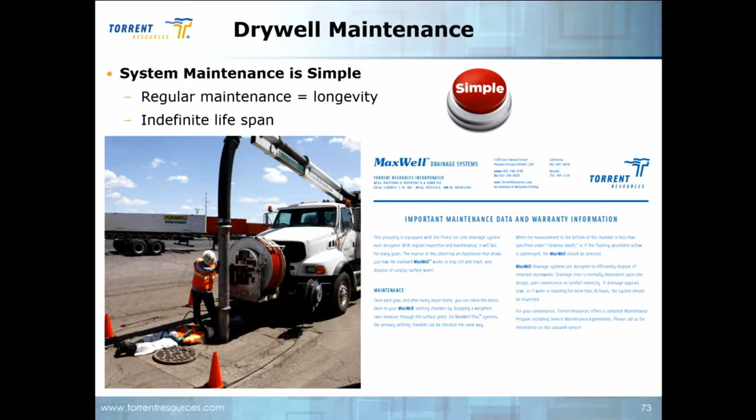Longevity: 99% of the drywells that Torrent has installed over the last 43 years are still in operation. So the pre-treatment is the key. It allows us to trap out the sediment and keep it out of the gravel pack, and these things last basically indefinitely. We've not seen any get ruined.

So here's some conclusions. Drywells, again, after all the studies we've seen and our experience, very minimal risk of aquifer contamination. We can get past the confining layer. We're recharging the aquifer with all that storm water. Drywells can have a long service life if they're designed properly. A very small footprint, relatively low cost, fast. Again, we can be in and out in 3 days per system. I think that's pretty extraordinary.

Simple to maintain, and we can do them in a flow-based or a volume-based design. Phoenix, it's 100% volume-based. Those drywells that we put in Los Angeles are all flow-based designs where they're trapping off the first flush or some of the peak flows and putting them down, and then everything else gets to bypass.

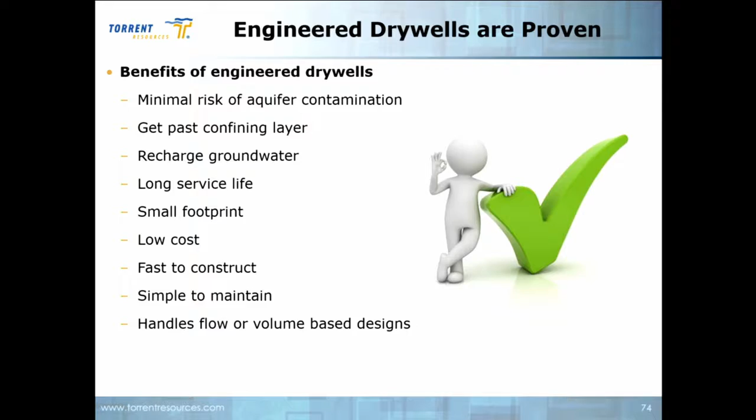So let's see, water's precious. This was interesting to me. Of all the water on the earth, 97.5% is salt water, and only 2.5% is fresh. And most of that is tied up in the ice caps and the swamps. So there's less than 0.1% of the water on the earth readily available for us to use. So I think we owe it to ourselves to really manage it properly and not let it run out into the ocean. Yeah?

Desalinization? Yeah. What are your thoughts on desalinization? Yeah, I think it's extraordinarily expensive. I think it takes a long time to get permitted, and I don't know personally, but I've heard it's extraordinarily heavy on greenhouse gases and energy consumption to produce the water, and of course then there's the byproduct of the really salty water that they have to dispose of.

So I don't know, I guess it depends on your position. There's an article by Water in the West, I think the next slide talks about it, so I'll just get to that.

There's 3 ways to have a sustainable water source. Desal is one of them, because if you can get the salt out, we can use that. The other thing is to increase the capacity of our reservoirs. This article, Water in the West, talked about

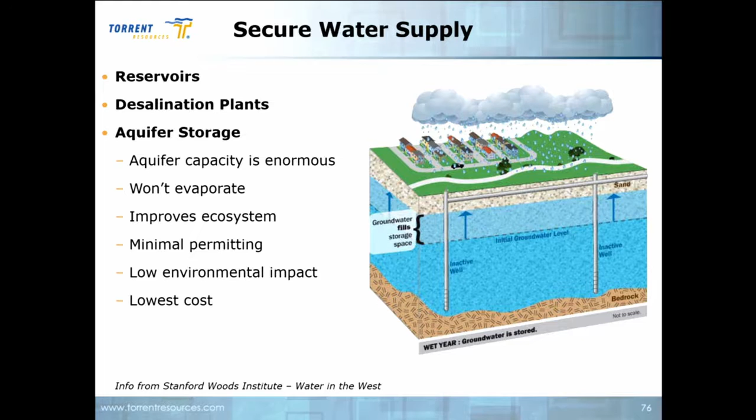So in what instances would you say a desalinization plant would be preferred over aquifer storage?

It's probably a site-by-site basis. I know they just built the one in Carlsbad. I'm guessing groundwater around there is maybe shallower since you're near the coast. Again, I don't know for sure. I know we've done a bunch in San Diego, but they're up on the bluffs and stuff. So it's a site-by-site basis.

Depends on how badly you need it. But I think that one took like a decade to get permitted and constructed. So you can build recharge wells, hundreds of recharge wells, in months. And the permitting is pretty minimal. The cost is extraordinarily minimal compared to something like that. So I don't know, I think you do what you have to do. Obviously, there's a desal lobby, and they would like to see more of that stuff go in. So I don't know, I like recharge through dry wells personally.

Can you go through some, one of your early slides listed the need for standards, design standards, regulation to create consistency. Can you describe some of the regulatory uncertainty or the permitting difficulties that people encounter? I mean, I assume that's... Yeah, no, I think that's a good question.

I think up here, Barbara did go through some permitting to get their Elk Grove wells put in, but in Southern California and Arizona, there is no permitting process other than the drywell gets shown on the civil drawings, it gets reviewed and approved through the plan review process, and it goes in. And then we register the drywell with the EPA, or in Arizona, we register it with ADEQ, Arizona Department of Environmental Quality, but there's no permitting per se. That's like a big onerous process.

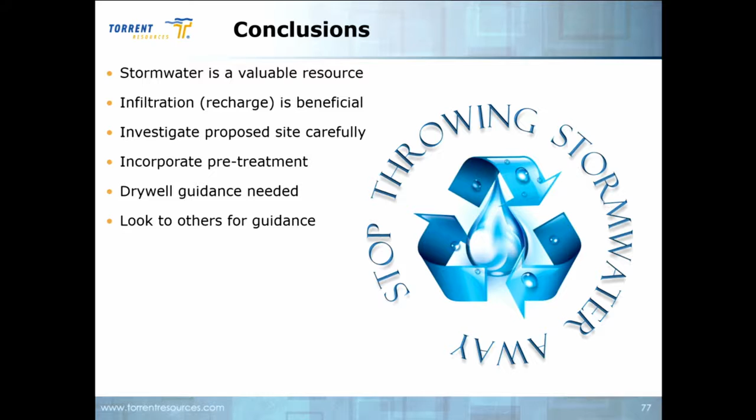Again, in Arizona, we've been doing dry wells for 40 years - we've got it pretty well dialed in. We haven't had any contamination issues. Our aquifer's in phenomenally good shape in terms of volumes, so we know how to do it. And again, 20 plus years in Southern California, to my knowledge they haven't had any issues or problems with groundwater contamination, et cetera, at least not through any dry wells we've installed or been a part of. So that's it. Ta-da! Questions?

Yeah, I'll jump in here, I guess. A couple questions - the first one has to do with costs and the O&M costs, and are those ongoing? So if you're going to put this thing in for 50 years, is it an annual cost, or is it not really covered in the initial construction, I would think, right? It's not, no.

So a single chamber dry well is about $30,000 installed, complete. It varies—it might be a little more if it's deeper, but most of the cost is in the upper 20 to 30 feet. If we had to go deeper, it's just drill time and a little bit more rock and pipe. It doesn't cost too much to go from 80 to 100 feet. It's a little bit of money.

A maintenance or dual chamber dry well is probably about $36,000 to $37,000. So yeah, 28 and 38 is what we say. And then the maintenance is $1,500. Average maintenance is 3 to 5 years between maintenance periods, so they last a pretty good long time.

That chamber can hold quite a bit of material before it needs to be cleaned out. If you've got a big grassy basin or something, it's 7 to 10 years between maintenance cycles. So a lot of HOAs in Arizona have these on their site, and they just budget for it in their annual budgets. If they have 20, they'll get 4 or 5 cleaned on a rotating basis.

Good, thanks. One other question—I think I know the answer to it, but it's more something to consider that I was thinking about as you were going through things. Has anyone done any studies just on the physics of the situation or the process, particularly in the vadose zone?